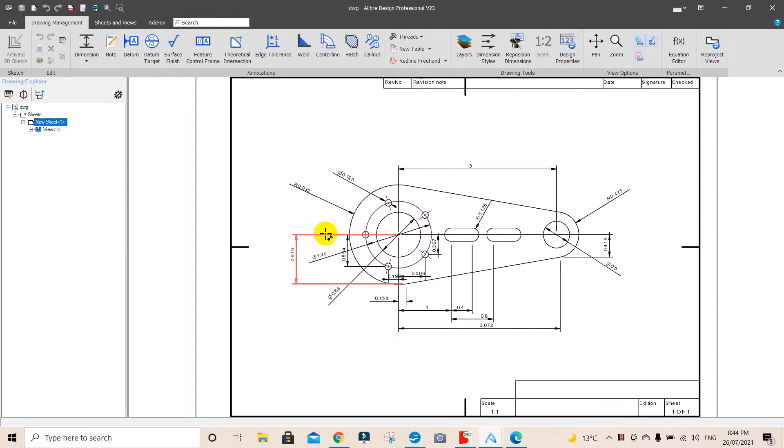The reason we can't just come in, turn cutter compensation on, and go straight to that point is the cutter will travel from that point to around about this point and leave a little scallop. When this is all finished, it's going to leave a little scallop around here on the job. So we want the cutter to end up at that point on the center line with the cutter compensation on - that's the little dance we're going to do. You'll see why down the track.

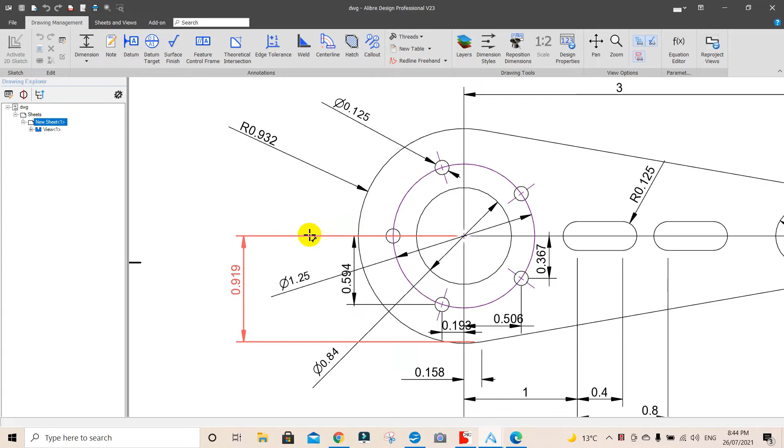But it needs a little bit of explanation in NCplot to make this all work. So I'll just zoom back a little bit here... that's a shocking zoom, isn't it? Let's see if we can fix this up a bit. There we go, come in a little bit closer. There we go.

Now let's go to NCplot. I've saved my old drilling program and called it outer profile, quarter inch end mill, and we've done our regular stuff - G54, G90.

We're going to change this particular one. It's gone to X and Y from the home position, we've got Z20, we're going to X and Y0. I want to take off this X1 and alter this one, because what we want is the radius of this - no, it's not 0.42, the radius is 0.932 plus another half an inch. So let's do that. We'll get our cutter to that point.

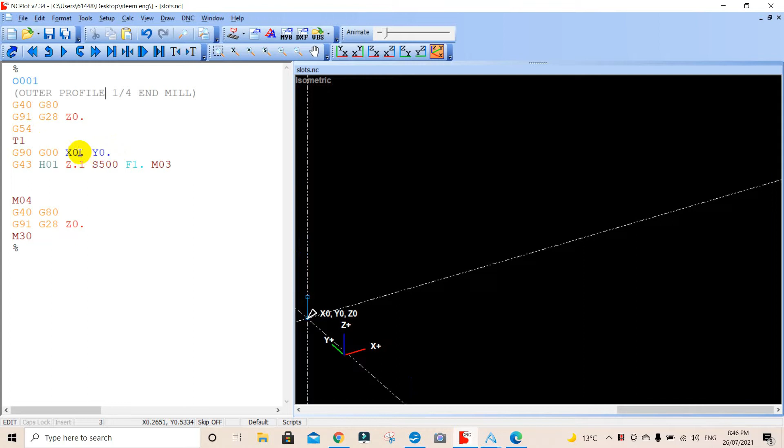So the Y is correct, it's the X. It needs to be - we're going back this way from the X, which is going to be negative. What's our figure? Negative... backspace... 1.43. I think that should be right, and we'll update that there.

So we'll go into this and have a look, we're at the 1.43 position, and we're going to feed down. At the moment we'll just put an M30 command in here so we don't see this rubbish at the end of it - that'll take it off. There we go, and of course we're still in the G00. We've turned our cutter, put the height comp on, set our tool height here. Speed's 500, feed rate's 1 inch - that'd probably be reasonable, we can always change it down the track.

And we've turned our cutter on. Now what we want to do is feed down - we need to come down to Z negative 0.025. We need to be in G01, which is linear interpolation, then Z negative 0.025, so we're going to go into the surface of the plate by 25 thou. We'll update that, and you'll see a little line appear down here. Now we've got our cutter down into the job, the spindle's running at 500 RPM.

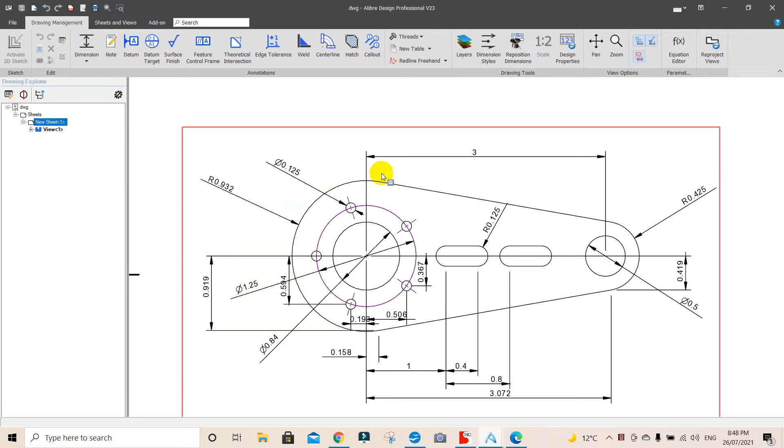So we're going to come over here. We want our cutter to arrive on the left-hand side here. If you look at a line through there and then sweeping down here, we want that cutter to be on the left-hand side of that, sweeping around, because if the cutter's going in that direction, you'll see it. We want it to compensate on the left-hand side.

So we'll go to NC plot. We want G01, but we want to do a G41, and that is cutter compensation to the left-hand side. We want a P value, which is the radius value of 0.125.

It's a quarter cutter, 0.15... 125, that's the radius of the cutter, and we're in G01. We're already in G01, but I'll put it in again. It doesn't really matter.

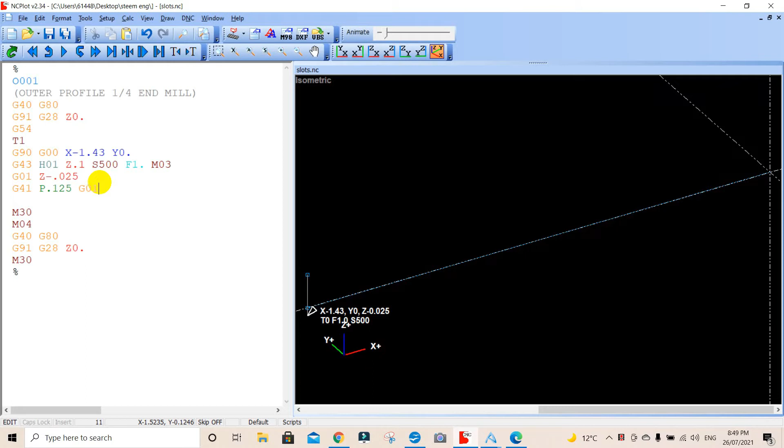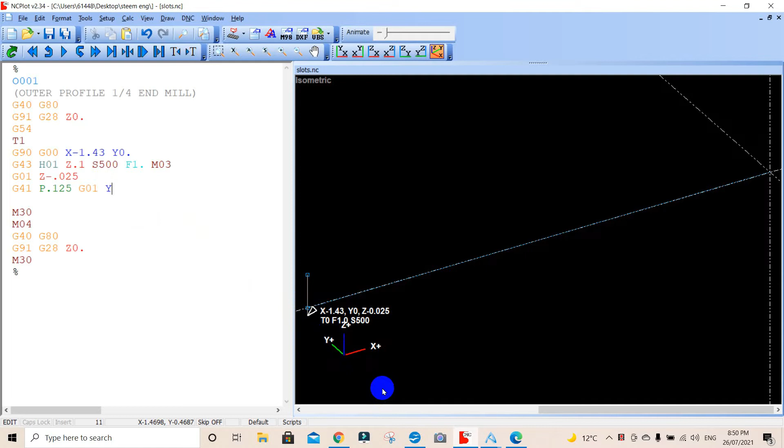We want to travel to Y, to Y negative 0.5 inches, and we'll turn that on there.

Now we have come across here. We'll just view this from the top. We've come here, our cutter is central here, but it doesn't show it on the screen. But by the time it gets to that point, the cutter will be, is it on the left-hand side?

We're compensating to the left. I think this is right; if it's wrong, you'll see it on the mill straight away. We're compensating so if it's coming down here, it's to the left-hand side of the cutter. So I might be wrong here, it might be the right. If it's G41, G42 is cutter compensation the other way. But it doesn't show up on here, it just shows a straight line, so it's just linear interpolation down to here.

And now we want to do a G03. A G03 is an arc, sweeping around to about that point, and then we're going to sweep around to the other side following the profile. So we're going to go G03, the next line is an arc, G03.

We want to arrive at that point there, which is on the edge of our part, with that cutter compensation on. Now I might be wrong with this cutter compensation, but I'm pretty sure it's to the left-hand side of the part. I think that's right. We want to arrive at X.

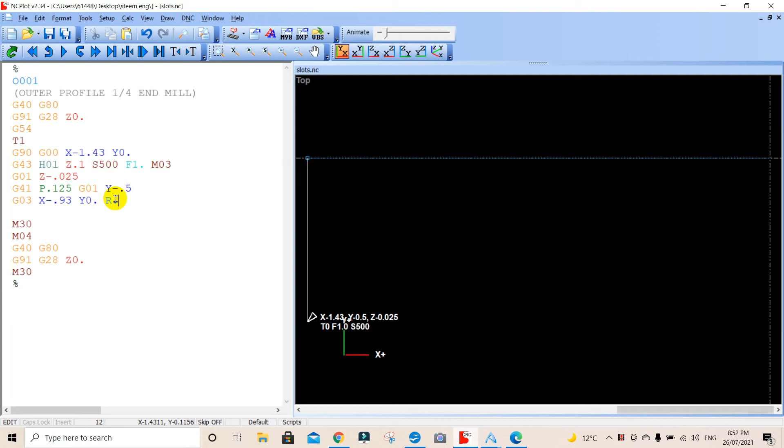And we'll hit this here, and it'll do a rather strange looking thing. It's swung around here, it's gone from there. You need to stipulate the start point, the end point of your arc, which is now that point there, and the radius, which is 0.5. So that means our cutter will now be rotating, spinning around here in that direction, with the center off here by an eighth of an inch, allowing for the radius of the cutter.

Okay, now that's important because we need to keep that in mind. We only have to follow the profile line around here now to get this correct. Now we've got that right. Now we need to be in G02, not G03, which is counterclockwise. We need to be in a clockwise direction, arcing around here to the next point, so that will be G02.

Enter. And we need the coordinate points, and I'll show you where they are. We need the coordinate points, which is actually here, but it is there, the line there.

0.919 to that point there, which is the same in the positive direction of Y. And it's 158 thou from the 0 point there to that point there, and the radius is 0.932. So let's put that in, and you'll see the arc swing around.

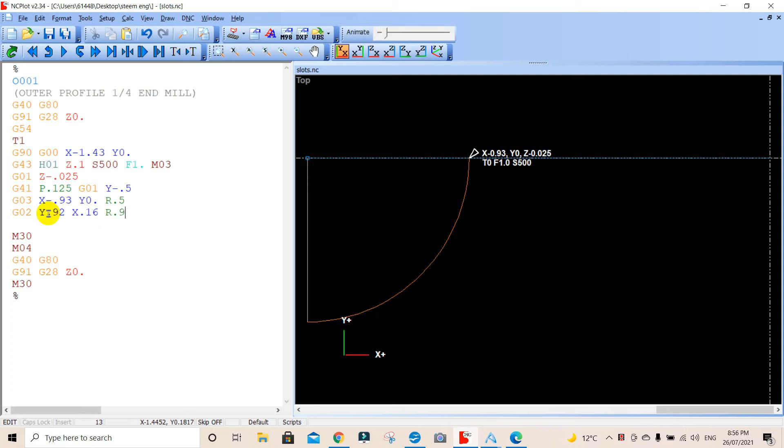Coordinates, our finish point, is Y 0.92, and X is 0.16, and the radius R is 0.93. Let's see what that does.

There we go. Let's view that. Now let's view that from the top, looking down. We see here now we have our cutter coming around here, and now we want to be in a linear interpolation following a line down here.

So now we need to be in G01, which is linear interpolation. So we go enter, G01 for linear interpolation, and remember our feed rate is 1 inch. It's modal. Every time we select anything different here, we've still got the feed rate exactly the same. So we need to feed up to this point here. We need to go down to that point there, and the intersection point is the same, only it's on the other side here.

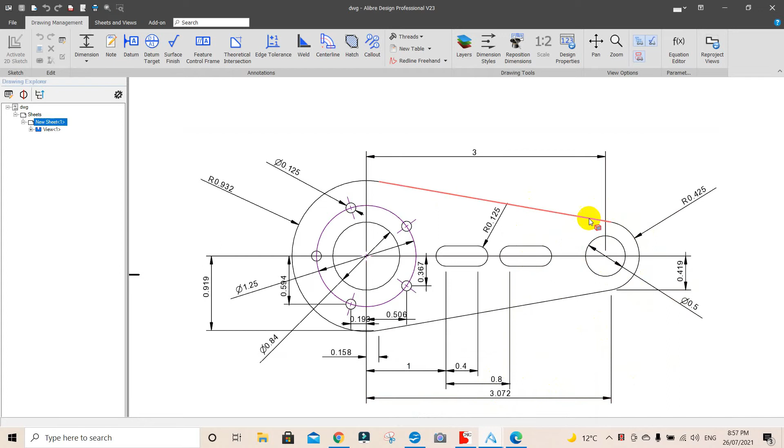It's 0.419 to that point there, and the arc point is this one here, which is 3.072, which is that point there, but we can just mirror that to the other side. So one's be a positive and a negative size there. So let's go back to our part.

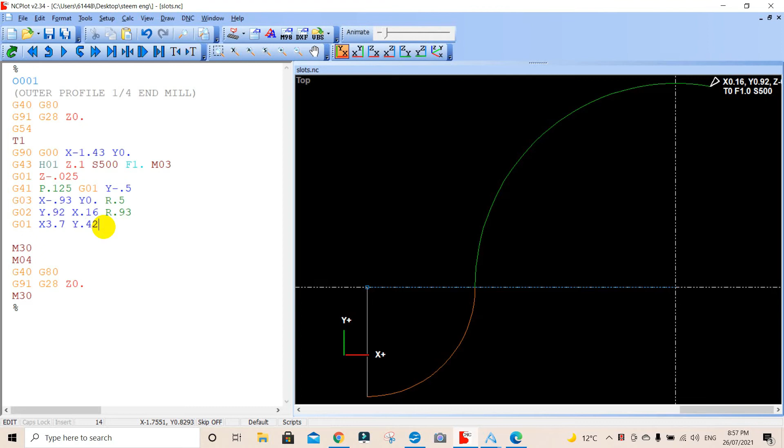So what we want to do is G01, which we are. X 3.7, Y 0.42. See what that does. Hit that button there and just see that.

So now we have our cutter now coming down in a straight line, linear interpolation, and now we need to swing all the way around to the other side. Now this time we did from Y0 around to here. This time we need to go from Y positive to Y negative. So we run now, we're rotating clockwise again, like we did here.

So that is G02 again. We're in G01, now we need to be back in G02. G02, we need to be in Y negative 0.42, and we don't need to worry about the X because it's redundant, because we already have that there, but I could actually put that X 3.7 there as well, but I'm not going to.

We don't really need it. We're just going, it's already in that dimension there. It'll just come over to here. We need to put in the radius of R 0.43, and we'll update that. Let's have a look at that.

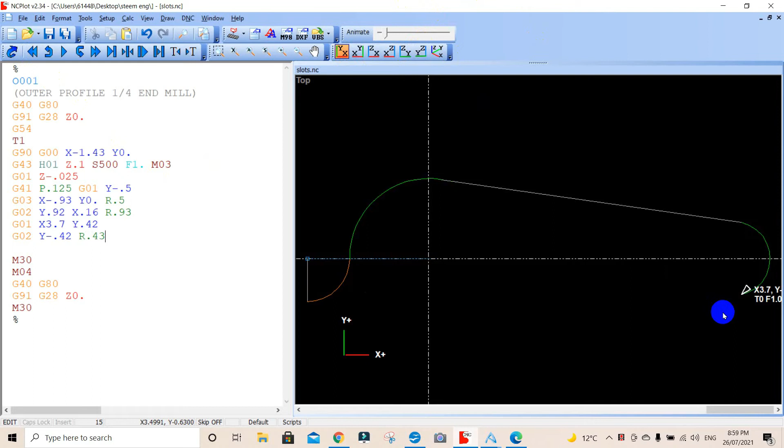There's our round here, and now what we need to do is the same thing here as that one. We need to be back in G01. So that is that previous line there. Let's just copy that line because that line there is just this line mirrored to the other side. So if we go this line here, no, it's not that line there.

Let's just type this in, I might muck it up. So let's just go, we're in G02, we need to be back in G01, G01. We need to be at this point here, which is the point X 0.16, and the Y is a negative 0.92, Y negative 0.92.

That should work. Now we've got an error here. We've got an X and a Y here, so that's the problem. We got an X, two Y's. That's a syntax error. So we'll do that again, see how we go.

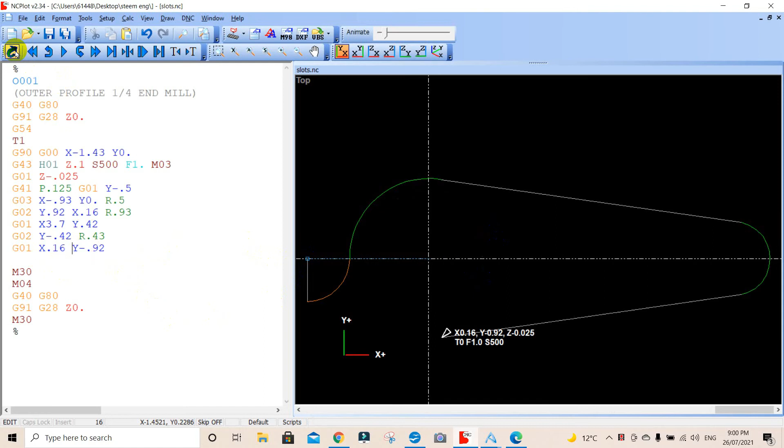There we go. And now what we want to do is swing this around to that point there. So we're still going G02, which is around this Y here. We're going G02, Y will be 0, and X is 0.93.

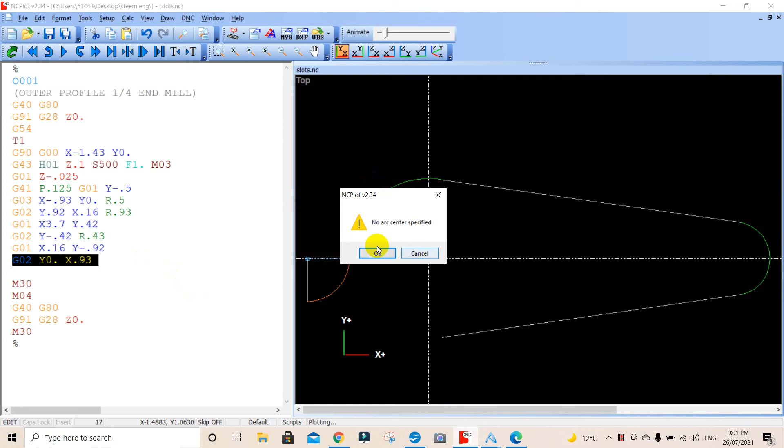Something's wrong with that. 0.93. Oh, we haven't got an R value because I didn't put the R value in.

R 0.93, which is the radius. Click on that again. Now I've gone the wrong way. What have I done? This is a negative figure. We've gone to that point there, but it should be that point there. It's a negative x, so we'll put in a negative there. Let's do that again. There we go. There's our profile done. No problem at all.

Now it's gone around one time, 25 thou deep. Let's just view this in 3D again. We're down a little bit. Let's go back again.

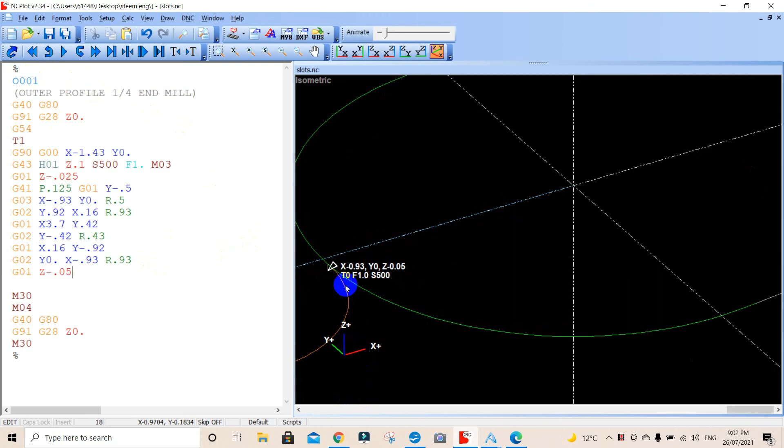We need now to go down in Z. We're at G02, we need to be back in G01. G01, Z, and with this don't forget we're absolute, Z negative 0.05, or 50 thou down here again. So we should see that little line coming down there of our cutter coming down to that point there, which we do.

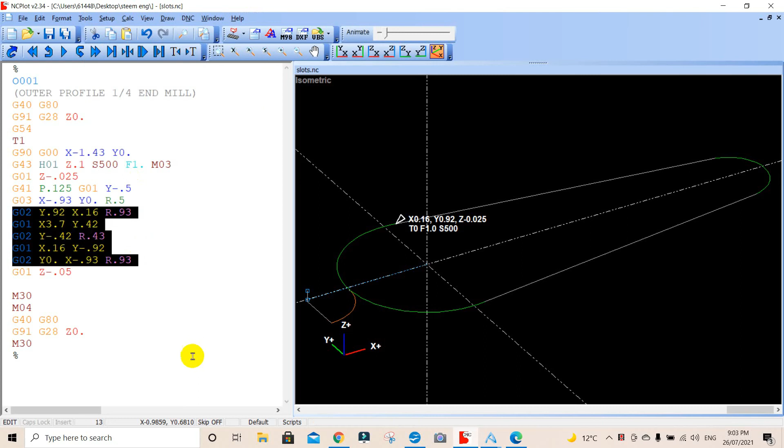Now, rather than write all this over and over again, we're going to cheat a little bit. We have here, we've done this point, we've gone to that point there. Everything from here on down we want to copy, apart from that. We'll go copy, right click and down here, and let's just paste that in. Paste, and we'll update that. Hopefully that will do what we want.

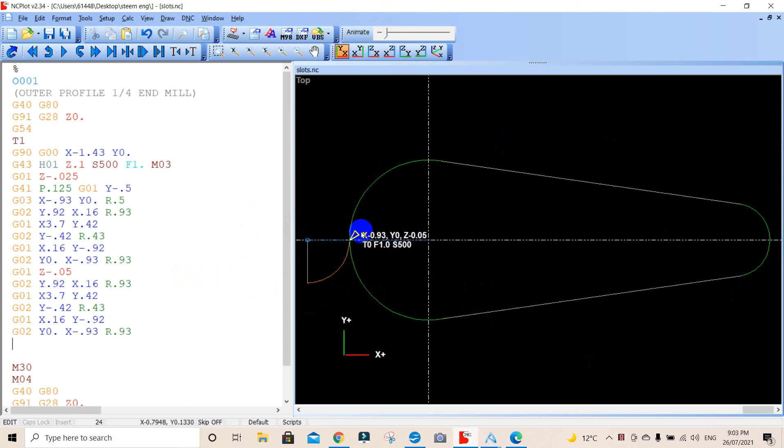And it has. Now I'll explain what's going on here. We've gone down another 0.05, but our cutter's already sitting in the right spot, spinning nicely. We've gone around once. All we need to do was follow that profile all the way around again, but 25 thou deeper. And that's what we've done here.

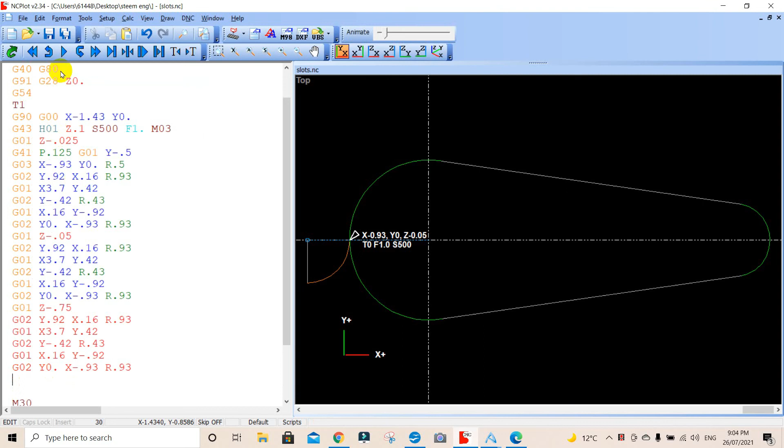We've gone to 0.05, and the next thing we need to do, we need to go with G02 - actually we need G01 again. G01, Z negative 0.75, and if we go enter and just paste again, paste the same profile over again. Let's have a look in the 3D.

We've done something, we've gone 0.75, we should have gone 0.075. There we go. So now we are at 75 thou deep.

And now we want to go Z, G - G01, linear interpolation, because remember we're in G02 from the last one, we need to be back in G01. Z negative 0.1, which is 75 thou last time, 0.1 or 100 thou this time. And of course we'll go enter again and paste this thing again, right click and paste and update that.

There's our third pass, and we've done something wrong here. What is it? Something's gone amiss. Let's just undo that. Redo that. Okay, what have we done? Oh, we've got X, we should have gone Z, you fool. Z, down 0.1. So that's what's mucking that up.

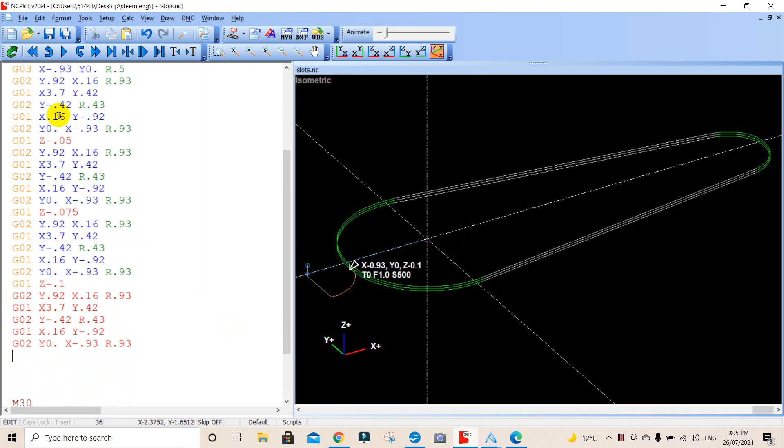So there we go. And we'll come down here, right click here and paste. And that one there, there's our next one. Now we're at...

100 thou. Now another 25 thou, and this will be through this part here. So we'll go G01, Z negative 0.125, which should break through this part. We'll go enter and paste again, that same profile again. We'll update that, and there we have our cutter path going around here.

Now the simple thing to do now is just to come straight off. We can't sweep this back out the other way and turn cutter compensation off, because it'll do a full depth cut sweeping around here, and we don't want that to happen. We just want the cutter out of the way. So all we need to do now is take off that M30 one there, which was changing things before. We're turning our spindle off, and now we're going to just go turn cutter compensation off. But at the same time, that's cutter compensation off there.

I think we want to get this out of the way. Okay, we'll go G01, Z positive 0.1 this time here, and just get this back up out of the way by 100 thou. So we're just going to go there. It should just come off. There we go, there, we're up at that point there.